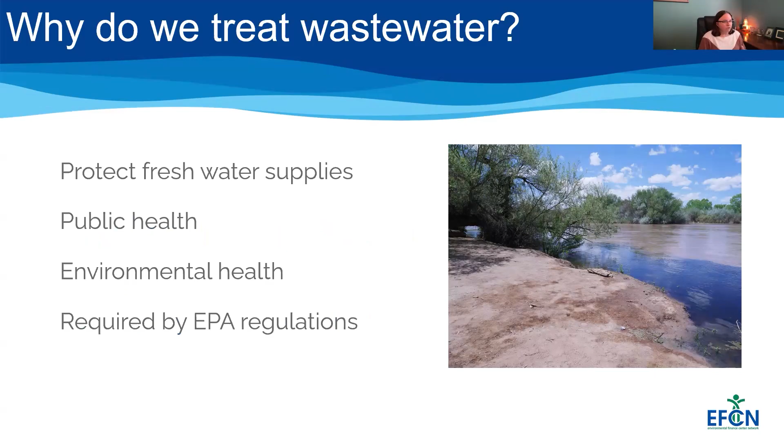So when we talked about treatment, we covered several high-level topics, but the first thing that we talked about is, why do we treat wastewater? So, of course, we treat wastewater to remove pollution and contaminants that are known to cause damage to the receiving bodies of water and disrupt the ability of other communities to treat their drinking water.

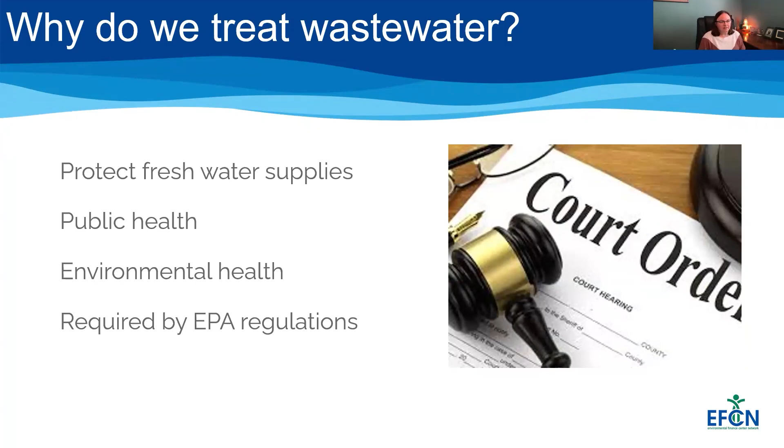Improperly treated wastewater can cause human sickness in waters that are used for fishing, for recreation, and of course as drinking water sources. Improperly treated wastewater that's discharged to the environment can kill local wildlife. It can cause long-term issues. It's also federally regulated. Any wastewater treatment plant that discharges to a point source, such as a river or a lake, is required to have an NPDES permit, which sets loading limits on different contaminants in the wastewater that the wastewater treatment plants have to treat for.

So what do we treat the wastewater for? Well, we treat for excess nutrients. Algae thrive in high nutrient environments, and they'll outcompete other plants and wildlife in the affected area. They'll grow out of control. They use up the oxygen. They can create dead zones or septic conditions in bodies of water. So we're definitely treating for nutrient removal.

Pathogens in wastewater cause human diseases. Some important ones to know that frequently appear in certification exams are cholera, typhoid, hepatitis, dysentery, polio. All of those can be carried in water. Solids and debris add to current amounts of litter that are polluting the environment, especially plastics that are slowly breaking down. And then there's the ongoing concern of what we're now dealing with, microplastics.

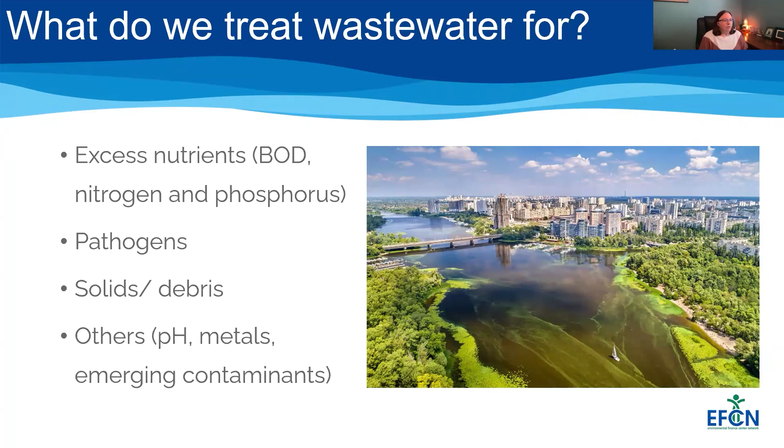Heavy metals can disrupt development in wildlife and humans. The same with pharmaceuticals. Lots of emerging contaminants that EPA is looking at right now. But all of those are things that we treat for. So, of course, as you're learning more and more about wastewater, understanding what wastewater treatment is about is super important. What is this NPDES permit that we're talking about?

National Pollutant Discharge Elimination System. So if you discharge to a body of water that's considered a body of water in the U.S., you have to have an NPDES permit. So it's required for facilities discharging to surface water. I guess that's not necessarily the case for tribal members, but it can be, especially depending on the body of water that you're discharging to.

So understanding and being familiar with what these permits are for is important, because they do specify your effluent limits of what can be in the water whenever you're discharging. It, of course, regulates your sewer overflows, stormwater, national pre-treatment programs, biosolids.

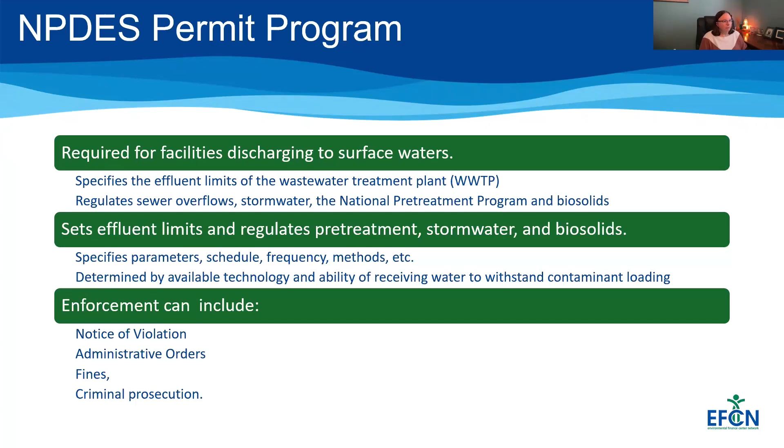It sets your effluent limits. It regulates pre-treatment. And if you are not able to meet your permit, your treatment's not working correctly, or you've had an issue or a failure, enforcement can include a notice of violation, administrative orders, fines, and even criminal prosecution. Because the work that you guys do is very important to public safety and health. So if it's negligent or intentional, it could even lead to prosecution. So very important to know and understand.

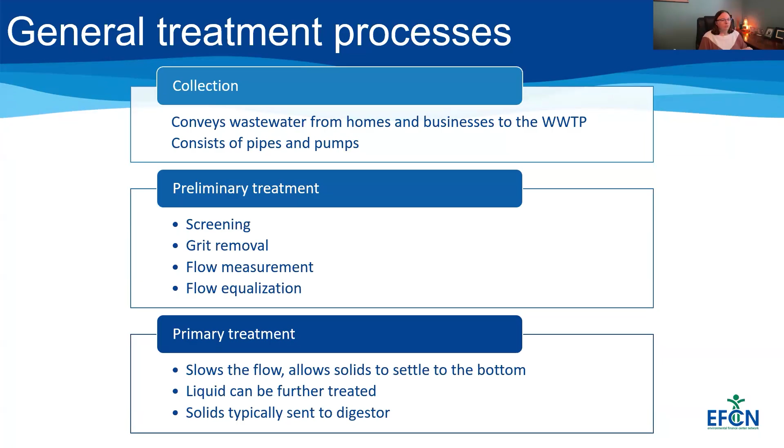The general treatment process that we talked about in this webinar, kind of 6 different levels. The collection system moves the wastewater from the home to the plant. Preliminary treatment is your large solids removal, your screening, your grit removal. Primary treatment removes your organic matter. Then we get into secondary treatment, where we're further removing organics.

The tertiary treatment, not all systems have tertiary treatment, but it is something you should be aware of and understand. This is a polishing stage, and typically it consists of disinfection, but it could also incorporate specialized contaminant removal, such as metals removal or phosphorus removal. And then sludge handling is the process, of course, where your solids are removed and treated and disposed of in a safe and healthy way.

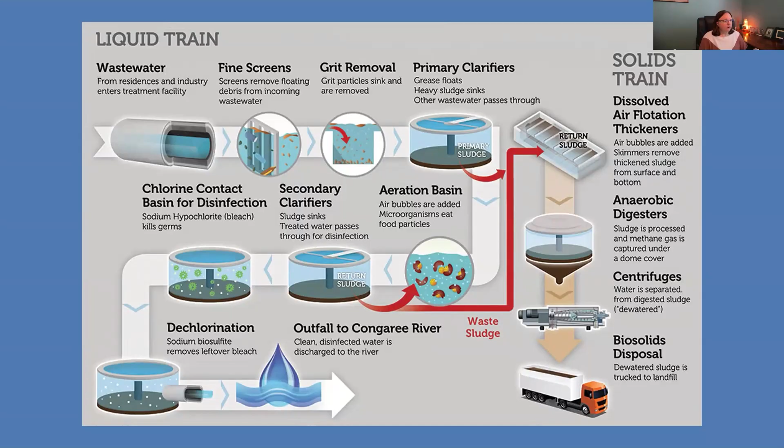The next 2 sessions, we talked about wastewater math. And we will have 2 more sessions on wastewater math. We understand that the math portion of the wastewater operator certification exam can be some of the most challenging sections. And so we want to make sure that you've got all of the information that you need. And if you feel like the math is an area that you aren't the strongest at, make sure that you go back and review these other sessions and get as comfortable as you can with the content that we share here. So 2 different sessions, one at the end of July, one at the beginning of August.

And some of the concepts that we covered in these sessions, we said these are the things that you need to make sure that you understand. These are some of the beginning math concepts to understand. So equations, percentages, units, and conversions. So if any of that sounds like I'm not speaking your language, then let's take some time to go back and review and get familiar with these concepts.

So one of the first things that we wanted to talk to you about was the order of operations. When you are looking at an equation, and it has different things in there, you want to know that there is an order that you are supposed to go about doing that math, and it is not necessarily left to right. Okay, so there's a phrase, please excuse my dear Aunt Sally, PEMDAS, that should help you remember what these concepts are and the order that they go in.

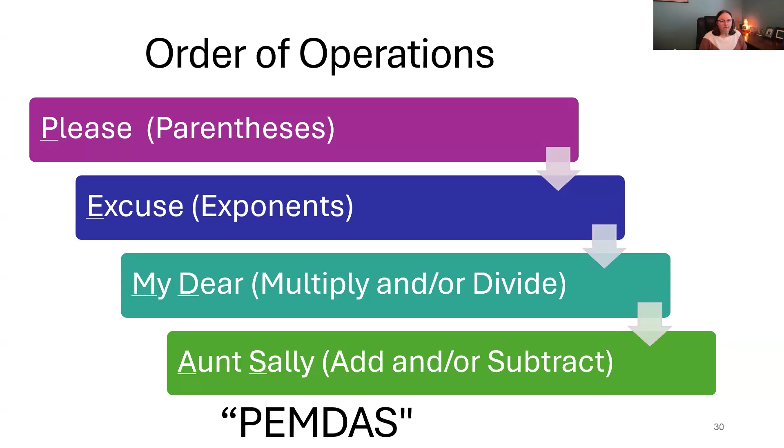And then algebra. So algebra is essentially solving for the unknown and rearranging things. So if you have an unknown, which is a letter such as D, a T, or an X, in your equation, that's what you are looking to solve for, right? That's the answer you're trying to get to. So that means that you need to get it on one side of the equal sign all by itself and everything else on the other side. And you do that by doing the opposite sign.

So here, 46 plus x equals 98. So you want to get x by itself. So that means you have to get rid of this 46. So we're going to subtract 46 from this side and subtract 46 from this side, and that will tell us what x is. Okay, so understanding how to rearrange equations to solve for the unknown. That's the first step in algebra.

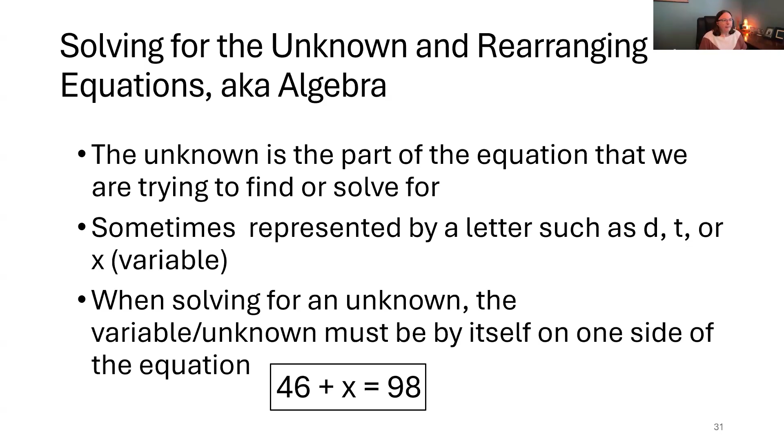And you will be doing a lot of that in wastewater treatment, especially when you're looking at some of the math questions on the test. So understanding how to rearrange equations and what that variable stands for is important. Understanding fractions and decimals, something else that we spent a fair amount of time talking about. So fractions and decimals, that means we're using a fraction or a decimal to represent part of a whole, right?

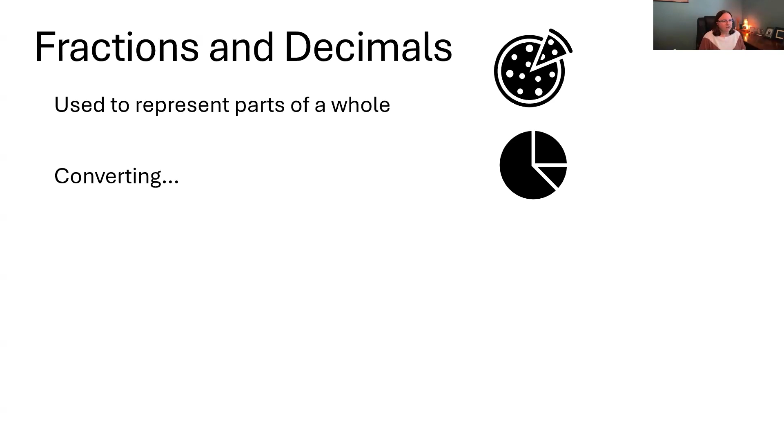So a fraction is a piece of the pie. If you have half of the pie, that 1/2 is a fraction, or 2/3 of the pie, or any of those kinds of examples, those are fractions. Fractions and decimals can mean the same thing. They both mean part of a whole. So when you convert fractions to decimals, you want to divide the numerator, the top number, by the denominator, the bottom number. So 1/2, 1 divided by 2 is equal to 0.5. So that takes your fraction to a decimal, right?

And then the other way around, decimals to fractions, you want to write that decimal as a fraction. So you're going to multiply the numerator and the denominator both by 100. And then you want to simplify to the lowest common denominator. So if you multiply 2.75 by 100, you get 275. And of course, 1 would be the bottom. 2.75 divided by 1 is still 2.75. Multiply it by 100, that's 100. So 275/100 is your fraction, but you can simplify that down to 11/4. So those are concepts that you should be familiar with.

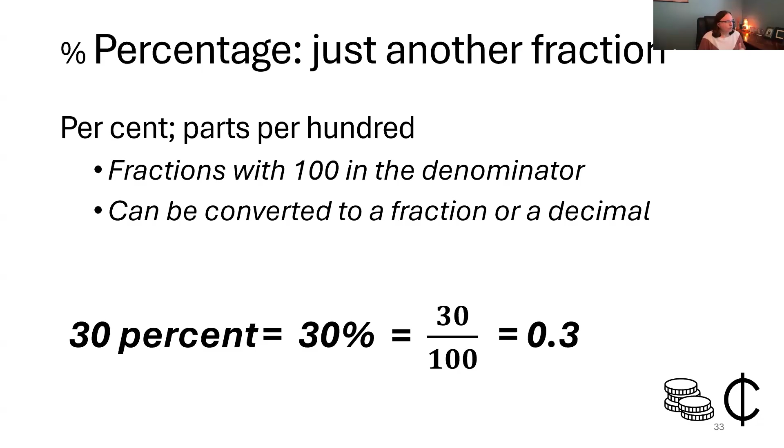And then percentages, that's just another fraction. So percent is parts of 100, right? So fractions with a 100 in the denominator, the bottom. So it can be converted to a fraction or to a decimal. 30% is equal to 30/100, which is also equal to 0.3 or 3/10. Okay, so those are concepts that we want you to be familiar with and be comfortable with going into the exam. The next thing we want you to be super familiar with and understand is units.

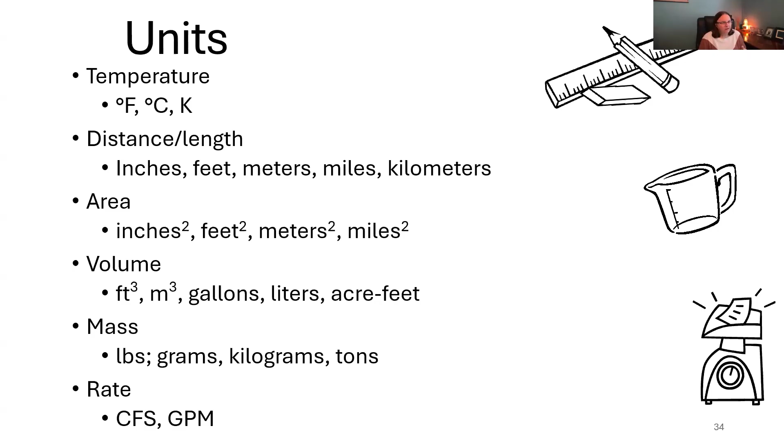Units will be on the test. They will ask you something in inches, or tell you something in inches and ask you for an answer in feet. Or, area could be square inches and then square feet. So making sure that you understand the units, what they are, and if you need to convert them to something else. And when we look at units, one of the things to keep in mind is that when we look at rates, rate is a variable or a measurement, and it's added to one of the other units. So what unit is in rate?

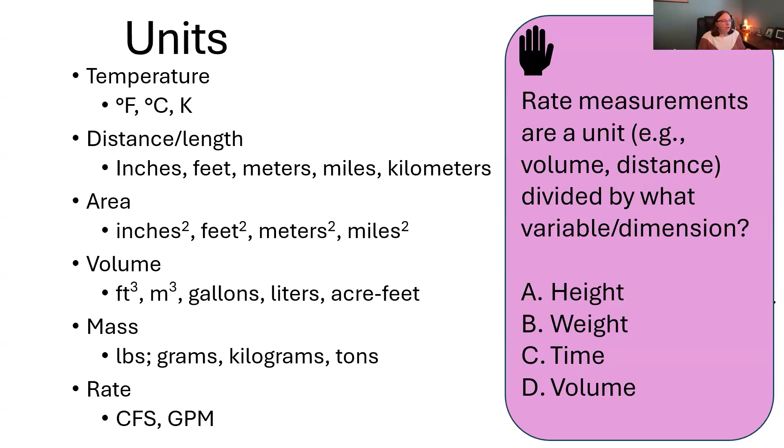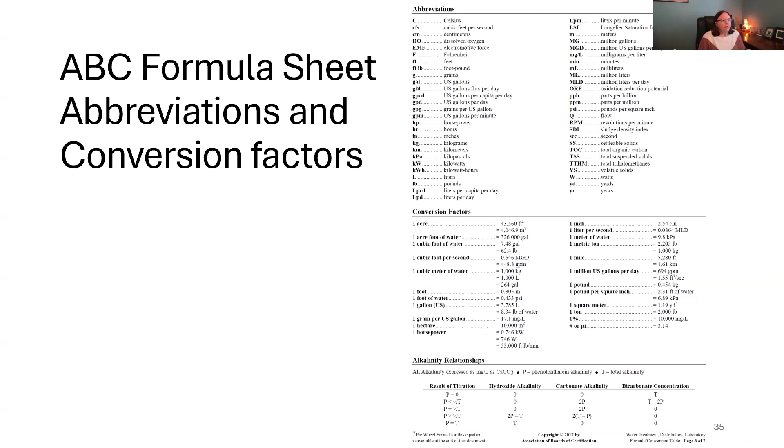How do we use conversion factors? Well, you're really multiplying or dividing your measurement by the conversion factor. You're just turning that conversion factor into a fraction and essentially multiplying by 1. Because you can multiply anything by 1 and not change its quantity, you're only changing the units. So you can go from gallons to liters. You can go from feet to inches. Lots of things you can convert to.

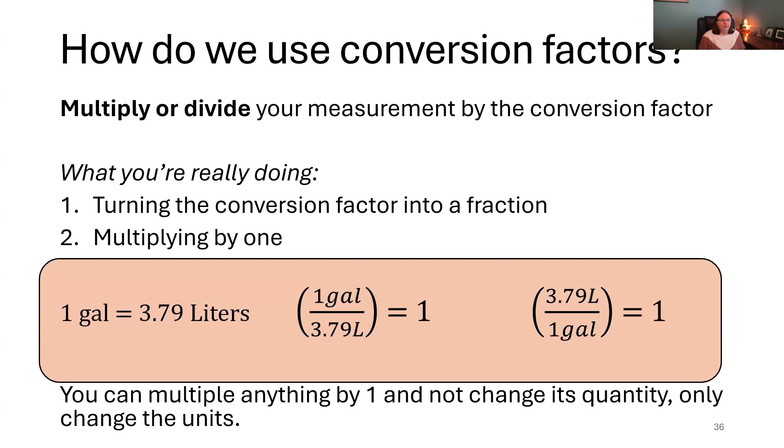Other things we wanted you to be familiar with: surface area basics. So when you're talking about surface area, you're talking about two-dimensional spaces. You're talking about something that's a square or a triangle or a rectangle. And so those are going to be units like inches squared, feet squared, miles squared, meters squared, acres. And you can convert from any one of those to another one with just that simple conversion factor.

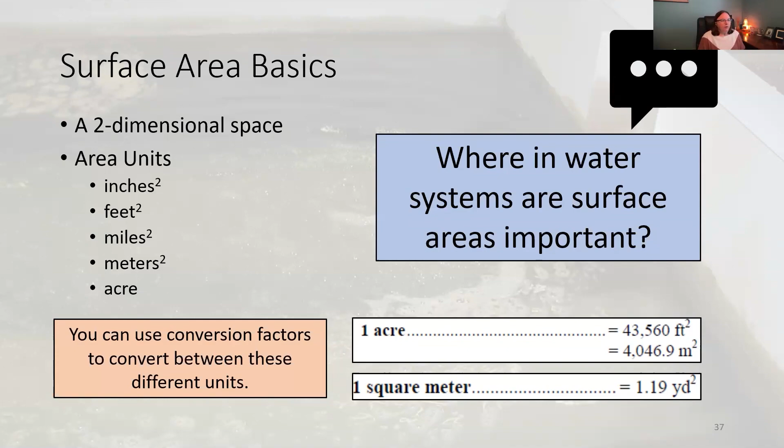Okay. And then we go into, where would this be helpful? Surface area. Why would we care about surface area calculations? Well, you might be looking at something like a wastewater pond liner, or how much weed fabric you need, or how much paint you need, or how much building material you need. All of those would be surface area calculations.

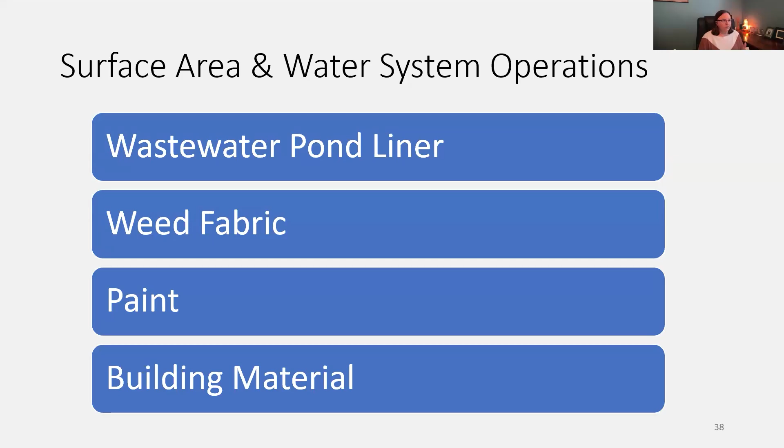Then you can go even deeper, dive deep into some 3D water math. Now we're talking about volume. So this is where we have a length, a width, and a height. So this is a tank, this is a box, this is a cube, this is a cylinder. And so here you're going to have cubic units because you have length times width times height. So cubic feet, cubic meters.

So you can see that you can multiply the length times the width times the height and get a volume, but we don't usually talk about volume in cubic feet. We talk about volume in gallons, so we can convert that cubic feet to gallons. And to do that, we use that conversion factor, and we can cancel out the units that are on the top and the bottom opposite one another. So we can get from 4,500 cubic feet to 33,660 gallons. So those are all things to be familiar with.

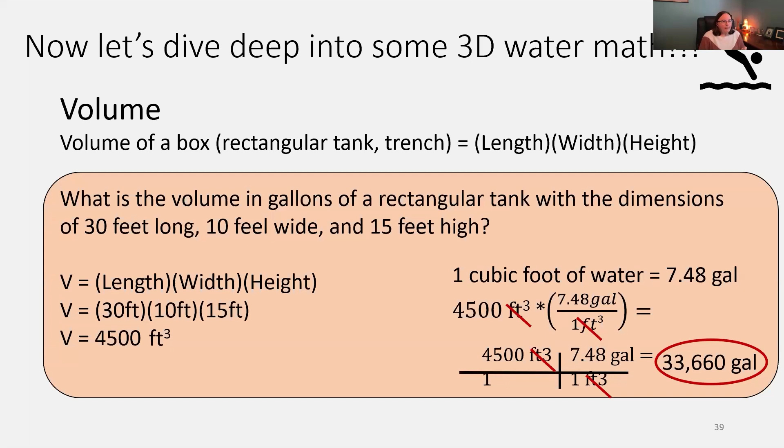When we talk about volume of a cylinder, it's a little bit different than the volume of a cube. So it's not length times width times height because it's round. So we don't have necessarily a length and a width. We have a circle. So we have to understand how that circle comes into effect. So the area of a circle times the height is how we get the volume of a cylinder. So you can either do that with diameter or with radius.

Radius, of course, is the distance from the middle to the edge of the circle, and diameter is all the way across from one side of the circle to the other. The math comes out the same. You're just looking at it from either you're comfortable using the radius or you're comfortable using the diameter. Diameter is always 2 times the radius. So things, again, to be familiar with.

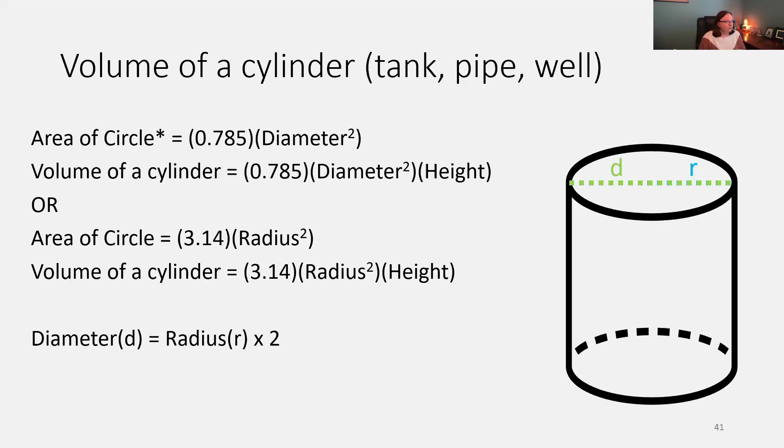Another concept to be familiar with, water pressure. So here we're talking about feet of head or pounds per square inch. Those are the most common. And when we talk about water pressure, we talk about it in tanks a lot, right? So we have tank A here. It's 5 feet in diameter and 75 feet tall, and it holds 11,000 gallons of water. Tank B is 50 feet in diameter and 75 feet tall, and it holds 1.1 million gallons of water. If we have a pressure gauge down here at the bottom of each tank, which tank would have the highest pressure? Tank A or tank B?

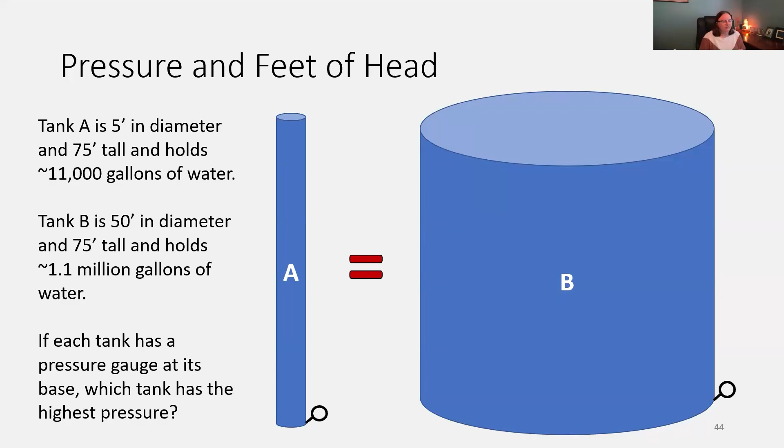They have the same pressure because pressure has everything to do with how tall the tank is and not how much water is in the tank. So pressure is based on the feet of head. The volume's not important at all. It's the height of the water. And that's the direct relationship between feet of head and pressure. So 1 foot of water is 0.433 pounds per square inch, or 1 pound per square inch is 2.31 feet of water.

Okay, so keep that in mind, that it doesn't matter how big the tank is, it matters how tall the tank is. The volume is irrelevant when we're talking about pressure.

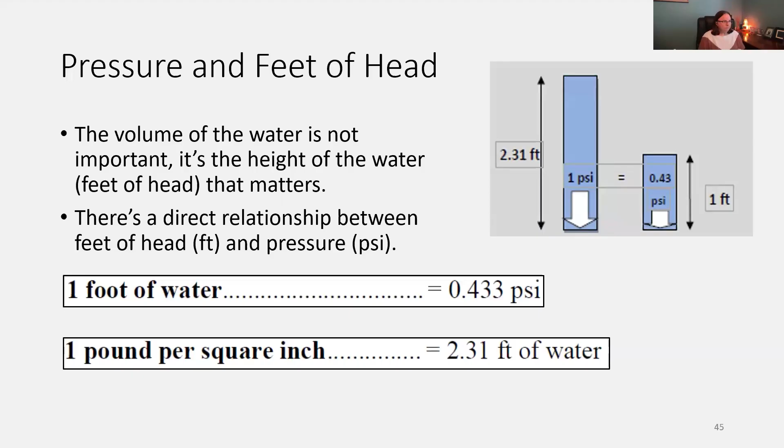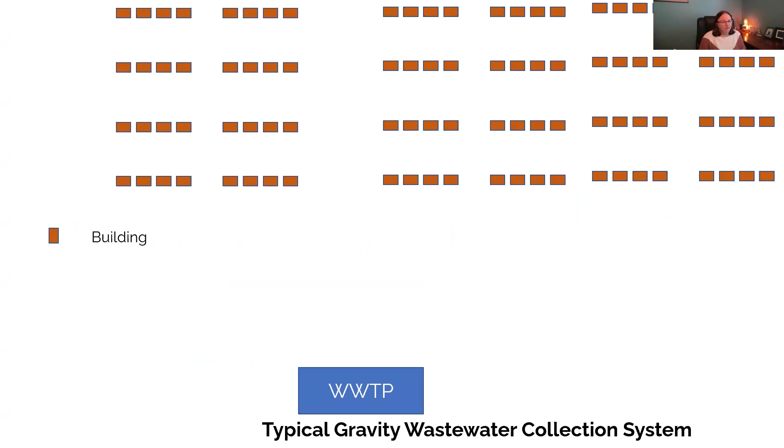The next concept that we talked about, the next session, was on collection systems. We had 3 different sessions on collection systems. We started by talking about the gravity systems. So if you think about a community, right, you've got a bunch of buildings and maybe they're laid out nice and square like this, maybe they're not. But you've got all these buildings and they have lines that go out of the building. So the wastewater leaves the building through that service line or sewer connection line.

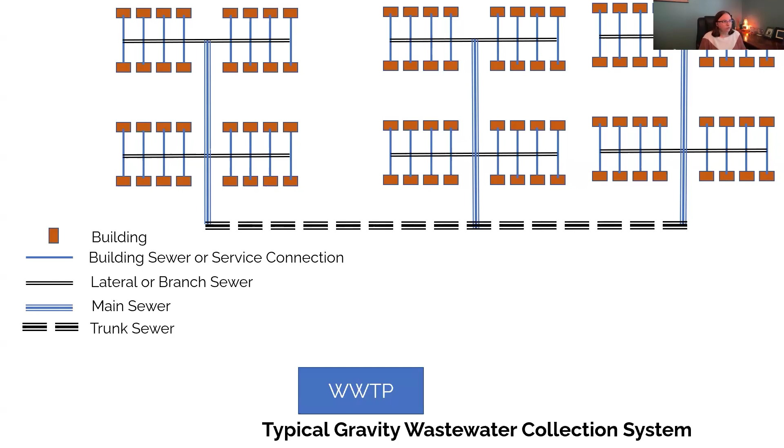And then those connection lines connect to a lateral or a branch sewer. From there, those slightly larger lines connect to the main sewer lines. Those bigger main sewer lines will connect to a trunk sewer line where you will more than likely have a lift station that goes to your wastewater treatment plant.

When we're looking at gravity collection systems, we want to be familiar with some of the design principles. So if water is moving through those pipes because of gravity, we know that we want the water to move fast enough that it prevents buildup in the pipe. So that's called scouring velocity. So we know that water needs to be moving at a minimum velocity of 2 feet per second. And so the slope of the pipe is important to understand, and the velocity of the water moving through the pipe is important to understand.

When we look at collection systems, they're typically designed for a maximum expected flow, the peak flow, when the maximum population density has been developed. So if you're putting in a new neighborhood and you know that right now there's going to be 10 houses, but eventually there's going to be 50 houses, you don't want to put in sewer pipe that's too small for the 50 houses. You want to put in sewer pipe that will eventually serve all 50 homes.

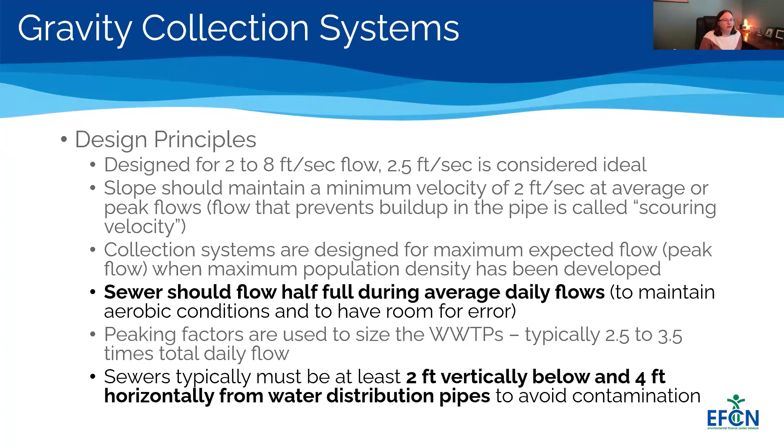So those are some things that your design engineers have to be familiar with and understand, but also that you should be familiar with and understand, because if you're laying sewer line or you're working on sewer line, you want to understand why maintaining slope is important. Separation between water and sewer, pipe sizing is important so that you're not putting in pipe that's too small, and possibly leading to pipe clogging, or having velocities that are too high, different things that can happen if the pipe's not properly sized.

We then talked about the different types of pipe. And so, we walked through the different types, and I'm sure you guys are familiar with some of these, but maybe not all of them. So if you see one of these on an exam, you now are familiar with it. Maybe you've not heard of VC pipe before. Now you are, vitrified clay. I think a lot of us are familiar with PVC and maybe cast iron or ductile iron, maybe not. Asbestos cement, maybe not, depending on the age of your system and all of the different things that you've experienced in life.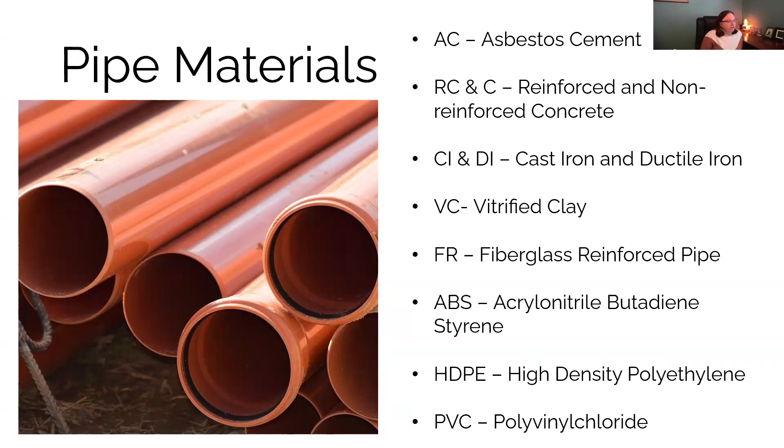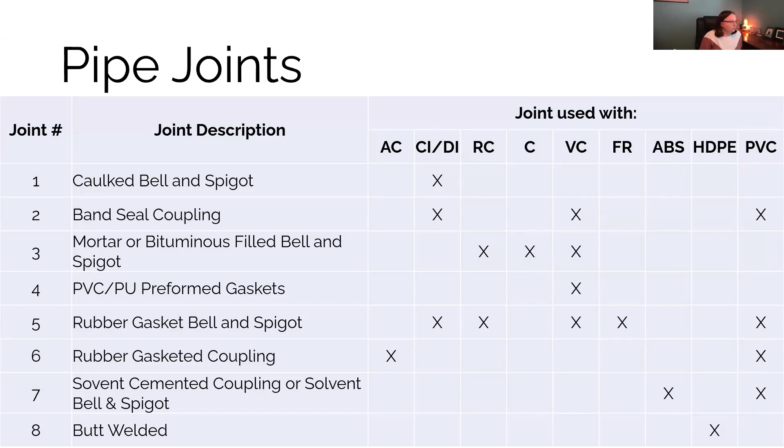So just be familiar with the different types of pipe, and then the different types of pipe joints. So there are different types of joints, and not every type of joint works with every type of pipe. So understanding the different types of joints and when you can use them is something else to be a bit familiar with. And I don't think this is necessarily a straight up memorization, but just a familiarity, that if you're using PVC, you're going to be using a certain type of joint. So we want to make sure that those bits of knowledge are familiar to you.

And then installation, so gravity collection systems. If you're thinking about your gravity pipe, of course, when you're thinking about installation, excavation safety is super important, something that you should be familiar with before you're ever in the field working on a sewer line. So your OSHA trench rules, understanding, and we'll talk about it a bit more, when to shore or have trench protection, those kinds of things.

Also understanding how bedding and backfill impact your pipe integrity. If your pipe's not bedded correctly, if it's not got the right type of material around it, your pipe can compress, so it's no longer round, but it's more oval. So that pipe integrity becomes a problem. So understanding bedding and backfill is important.

Knowing that your connections, the bells, if you have a bell type connection where one pipe slides over the other pipe for a small length, that the bells face upstream. Also understanding deflection testing and making sure that your pipe does stay round and that the water can continue to flow well.

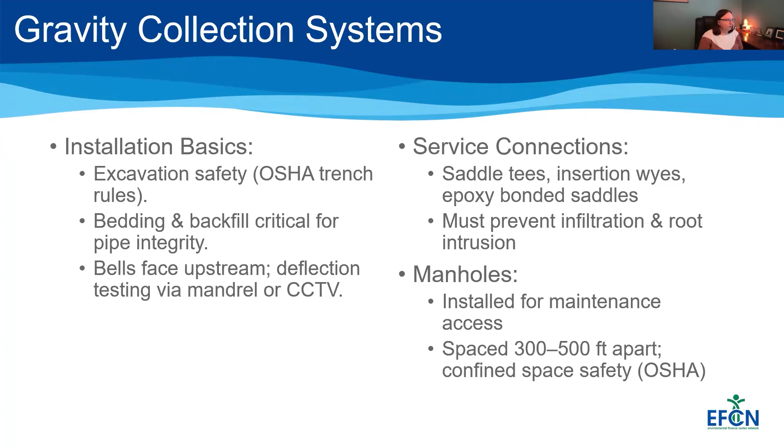Entering a manhole can be quite dangerous as sewer gases can build up in them. And lots of bad things can occur, suffocation and air poisoning and other things. So understanding your confined space safety before opening or entering a manhole, very important.

The next thing we talked about with collection systems was pumping and force mains. And I did this presentation. So the pumping and force mains of collection systems, we talked about what's the purpose of a lift station. Well, the purpose is to raise wastewater from a lower elevation to a higher elevation. And of course, that would require a pump to move the water into the force main. And after the force main, gravity typically takes back over again.

We don't pump from the lift station all the way to the wastewater treatment plant unless it's the lift station right at the treatment plant. And there are typically two different types of lift stations: a wet well, where there's only one chamber and the pumps are in the water, or a dry well where there are two chambers and the pumps are not in the water. They're adjacent to the chamber that holds the water.

We walked through the lift station components. There are lots of parts: pumps, hardware, bar racks, valves, electrical systems, alarms, motor control centers, pump controls, force mains. So we walked through what they were. You need to know what these do and how they work and what's required.

So for example, lift station hardware has to be high grade aluminum or stainless steel to prevent corrosion. So, where would you need that to be aluminum or stainless steel as opposed to a metal that could rust and fail? So understanding the components and how they work and what the requirements are for them is important.

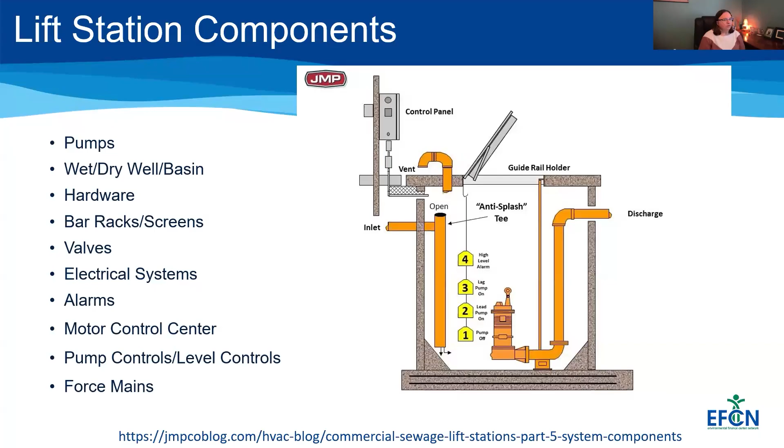Most lift stations do have three-phase electrical service and backup generators. And that's not always the case, especially in our smaller systems. But I think for the operator certification exam, that's going to be the assumption, is that they have three-phase electrical and backup generators. So being familiar with those components is important.

When we talked about lift stations, we talked about operating them. How do they operate? Well, the water flows into that wet well, into that storage tank, that concrete storage tank. And as the water flows in, the water level goes up and up and up until it reaches the first set point. And at that first set point, the first pump should turn on and the water level should start to decrease because the pump is pumping water out of that tank.

If, however, the water level continues to increase, a second set point will be reached and a second pump will come on. And this is only if the tank or the pump station is equipped with a lead lag pump. So sometimes they're not, but sometimes you have lead lag pumps where there is a second set point because flow rates can vary.

So you could have a second set point. The water is then being pumped out faster than it enters, so the level decreases, a low level set point is reached, and that turns your pumps off. And those set points can be controlled by a variety of things: floats, gauges, different things. So understanding how they operate and what those set point controls are is important.

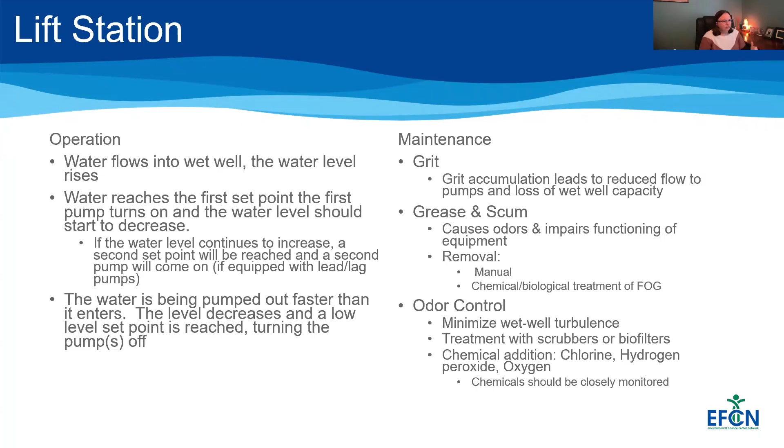And then maintaining lift stations: grit is always an issue, grease and scum and what it can do to a lift station, and especially those set points, clogging them, blocking them. And then odor control. You can have a fair amount of odor at lift stations because you are creating some turbulence and releasing some wastewater gases. So there are ways to control the odor at lift stations. So all things to be familiar with.

Lift stations have pumps in them. There's typically two types of pumps, positive displacement or centrifugal pumps. And so understanding the difference between those types of pumps is important. Lift station pumps are more often than not centrifugal pumps. As we talked about the two different types, they can be positive displacement, but more common are centrifugal pumps.

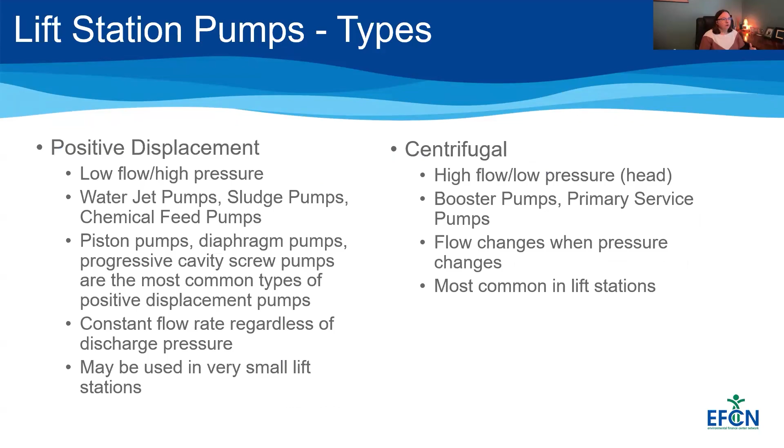So understanding the operation of them: of course, you don't want to start them or run them dry because the water is used as lubrication. So if you run them dry, they're going to probably bind up, and that's never a good thing.

And pumps can cavitate. If the pump's not running at the designed flow or pressure, it can create a vacuum. And that vacuum will cause the water to turn into a vapor. And when it returns to liquid, it reacts quickly. It causes damage to the pump, and over time, that can lead to significant damage. So understanding that a cavitating pump can sound like a can of marbles being shaken is important. There are other indications of cavitation as well, but the marble sound is a very common one.

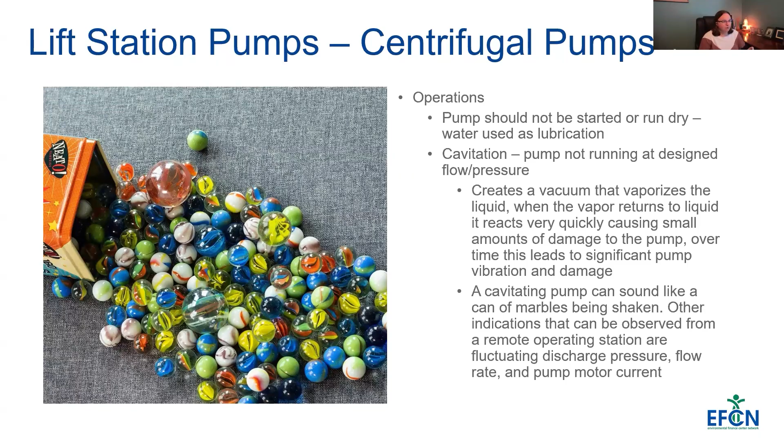And then finally, lift stations pump the water out through a force main. So this is the discharge pipe of the lift station. It is under pressure. The water is under pressure. The rest of your system is probably not under pressure. It's gravity pipe. But here, in your force mains, the water is under pressure.

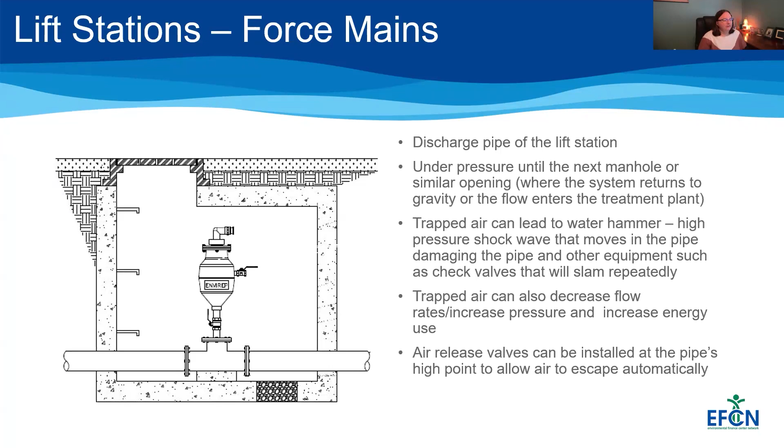And you can trap air in the system and have shock waves or water hammer. It can decrease flow rates. It can increase pressure, and that can all increase your energy use. So air release valves are sometimes installed to help allow that air to escape automatically. So again, high level, that's what we're covering about your pumps, your lift stations.

Next, we talked about collection system maintenance. So some of the common collection system issues: we categorize our most common collection system issues into these four areas: obstruction, structural issues, environmental issues, infiltration and inflow. So being familiar with what can cause collection system obstructions is important.

So how do you inspect or monitor your collection system? Well, there's several different ways. There are visual inspections, so popping your manhole lids, looking to see what's going on in the manhole. CCTV, so this is a video camera that you can put inside of your pipes and see the inside of your sewer system. Flow monitoring, where you look at measuring your flow rates to identify different flow patterns.

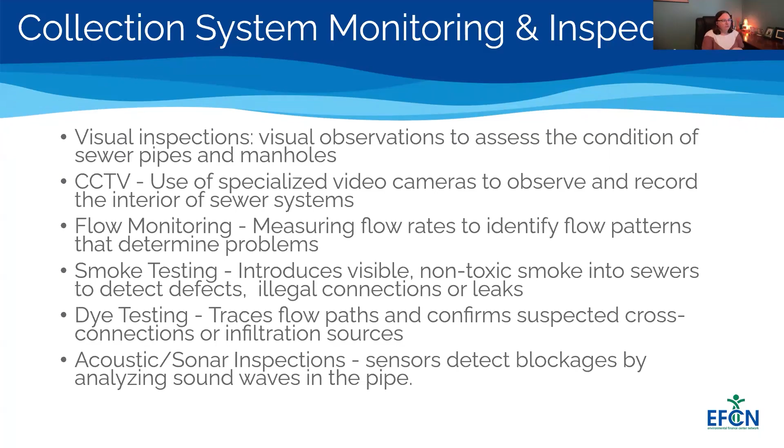Smoke testing, so you put smoke into the sewers, and if smoke is coming out in places it shouldn't be, that indicates connections, illegal connections, leaks. Other things, dye testing. This is where you put a dye into the water and you can trace your flow. And then there's acoustic sensors and sonar inspections that can help detect blockages, things of that nature.

So how do we maintain our system? Well, we want to understand preventative versus emergency maintenance. Preventative is scheduled work, it's proactive work, and emergency, of course, is unplanned, it's reactive. We want to aim for more preventative maintenance than emergency maintenance.

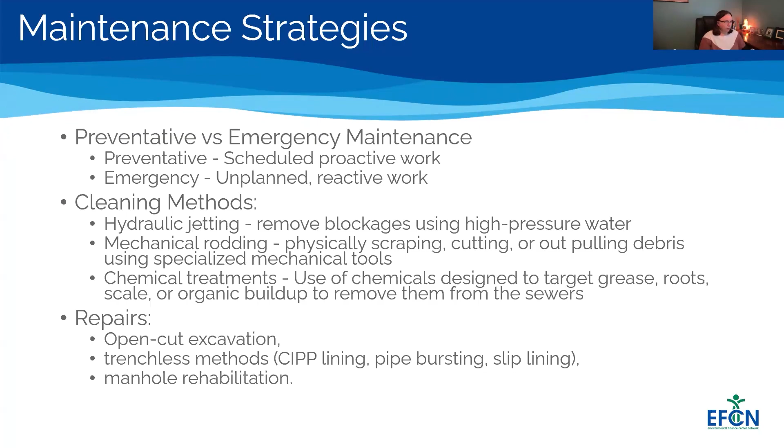Cleaning methods: we can use hydraulic jetting, mechanical rodding, chemical treatments, and then, of course, repairs where we have open cut excavation, or we use a trenchless method like pipe lining, pipe bursting, slip lining, and then there can be manhole rehabilitation as well. We talked about maintenance planning and scheduling.

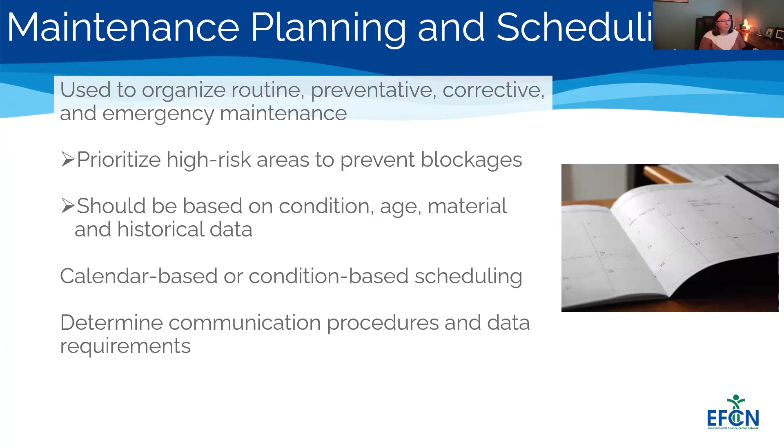We want to use maintenance planning to organize and plan our routine preventative and corrective maintenance. And then our emergency maintenance is harder to plan, but be aware that we will still have emergency maintenance. Prioritizing our highest risk areas to prevent blockages. We also want to take into consideration the condition, the age, the material, and any historical data that we have. And we want to schedule maintenance using a calendar or condition-based scheduling. So those were all concepts we talked about in that session. Next, we talked about operator safety.

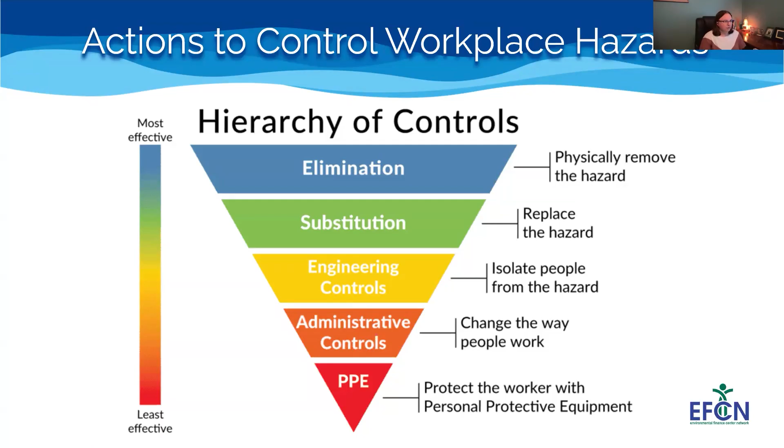When we think about hazard control, wastewater can be an infectious material, so you want to use your PPE like your gloves, your safety glasses. Of course, it's water, so it can be slippery. You should use caution around any wet environment. You should learn to swim. And you should be familiar with where your personal flotation devices are. Electrical hazards exist with anything at the wastewater treatment plant or any lift station. You should have a lockout tagout program.

Excavation safety. If you are digging, you should have excavation safety training using shoring, shielding, or sloping to prevent trench cave-in. It's almost impossible to save a life if there's a trench cave-in. Ladders are required in excavation safety. Chemical hazards, understanding what safety data sheets are, understanding the safety squares, those diamonds that have the different colors, and using your PPE. And then confined space, understanding that any confined space requires a permit and requires monitoring.

Safety equipment, your respirators, your SCBA, your self-contained breathing apparatus, your emergency gear. And then I kind of added your gloves, your eye protection, your toe protection, and your inoculations. The next session that we looked at was preliminary treatment. So we started getting into the treatment process in this session back in October.

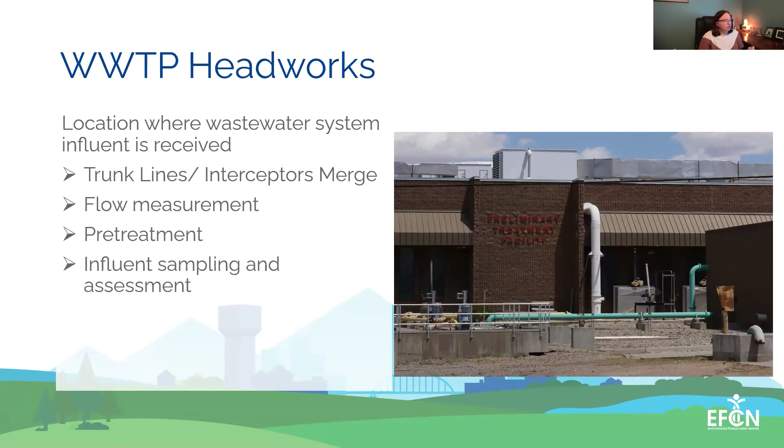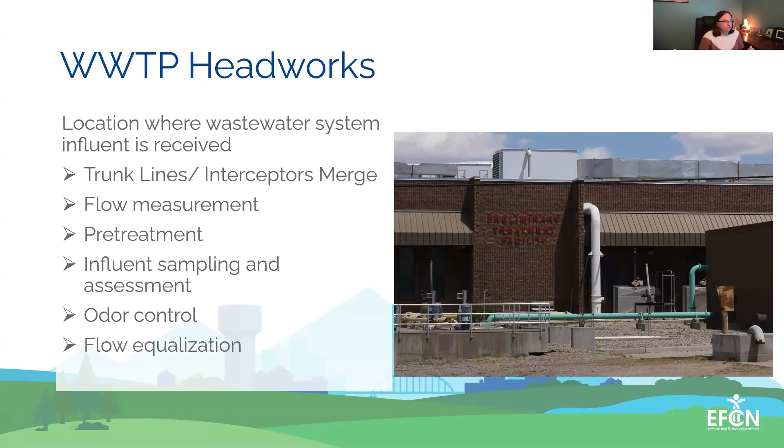So here we were looking at anything where the wastewater system influent is received at the treatment plant, the headworks. So these are your trunk lines, your interceptors. This is probably where you're doing flow measurement, where you have any pre-treatment, where you would do influent sampling. You may have odor control. You may have flow equalization. And flow equalization can also be used for emergency storage, which sometimes is necessary, and any pre-aeration.

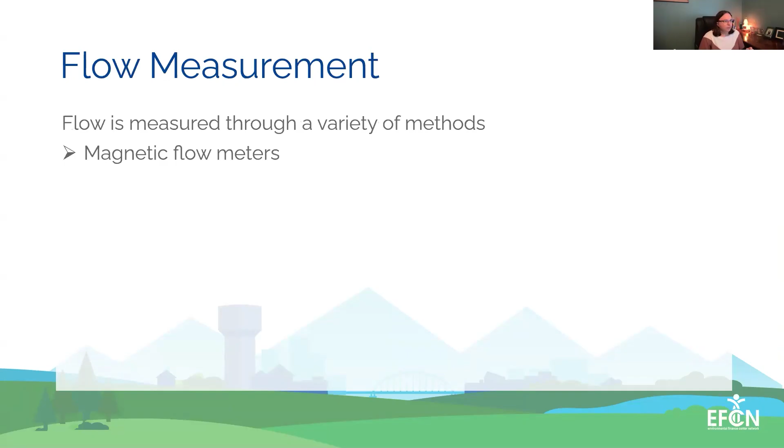Flow measurement happens here. So flow is measured through a variety of different tools. So you might have magnetic flow meters or mag meters, a Parshall flume, V-notch weirs, rotameters, ultrasonic level sensors. You want to make sure that your flow meters are placed in easily accessible areas and that they're in long straight sections of pipe. If not, if they're in a place where there's turbulence, it can create inaccurate readings. So different types of flow measurement that you should be familiar with.

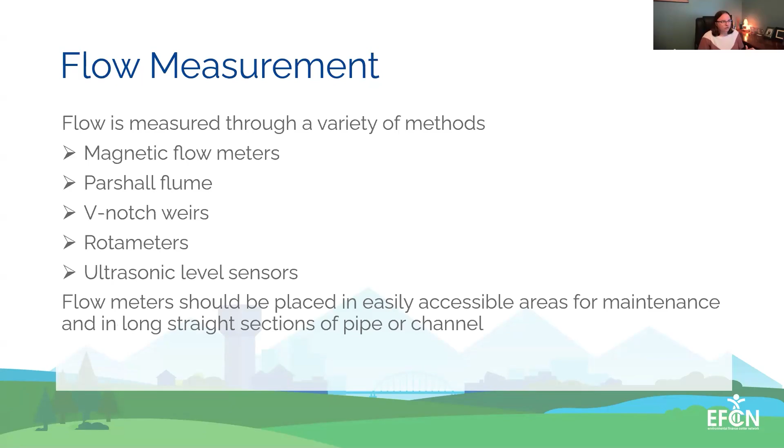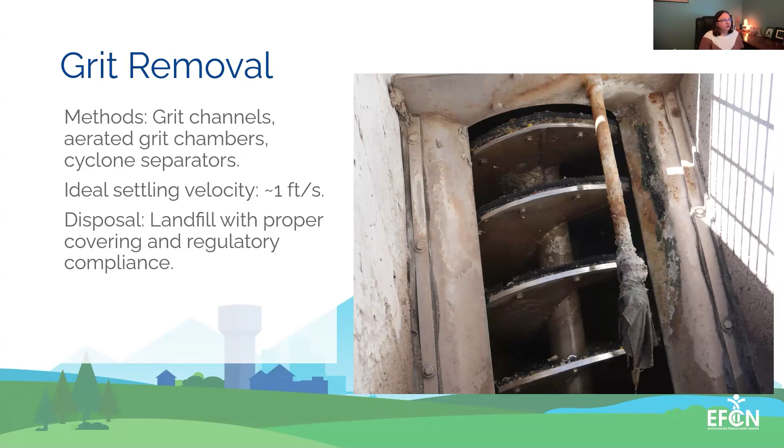Grit removal. You could have grit channels, you can have aerated grit chambers, you can have cyclone separators. They should be allowed to settle. So the ideal settling velocity, 1 foot per second. And again, disposal at a landfill. So other pretreatment information, we want you to be familiar with influent sampling, that you can do composite or grab samples. You may need odor control and your flow equalization pre-aeration.

If you have equalization tanks, these are used to help manage your peak flows so you don't have this big, huge amount of water come in suddenly. It slows that flow down and makes the flow entering your wastewater treatment plant nearly the same all the time. And then pre-aeration can help improve your treatment efficiency, and it can help with reducing odors.

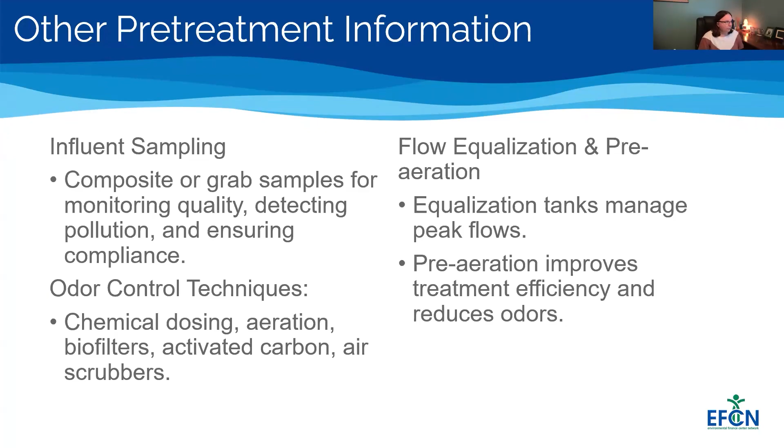The next session was on sedimentation, flocculation, and flotation. And goodness, I am moving through this as quick as I can, but we covered a lot of material. So if this is all sounding familiar to you, that's great news.

And if not, I hope that you will take the time to go back and review some of these sessions.

So the differences between sedimentation, flocculation, and flotation: they're similar, serve similar purposes. But sedimentation is where the heavy particles settle to the bottom by gravity. Flocculation is where we use something to cause the small particles to clump into larger ones, whether that's a polymer or a different type of chemical, which makes your settling faster.

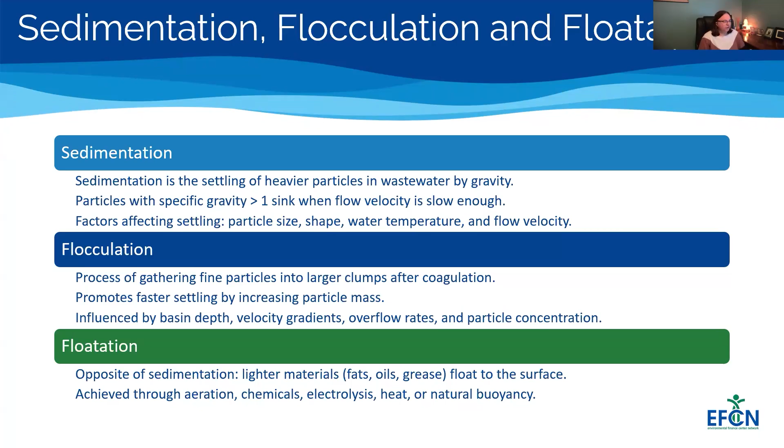Flotation is the opposite, where the lighter materials float to the surface, your fats, oils, and grease. And this is achieved with aeration, with chemicals, with heat, other ways. The sedimentation principle of solid settling and lighter items floating to the top is used throughout treatment. It can be in preliminary treatment, in grit removal. It can be in primary treatment, in removing your suspended solids in your clarifiers, and secondary treatment in your biological floc removal, if that's in your activated sludge process. So the idea of sedimentation is used all throughout wastewater treatment.

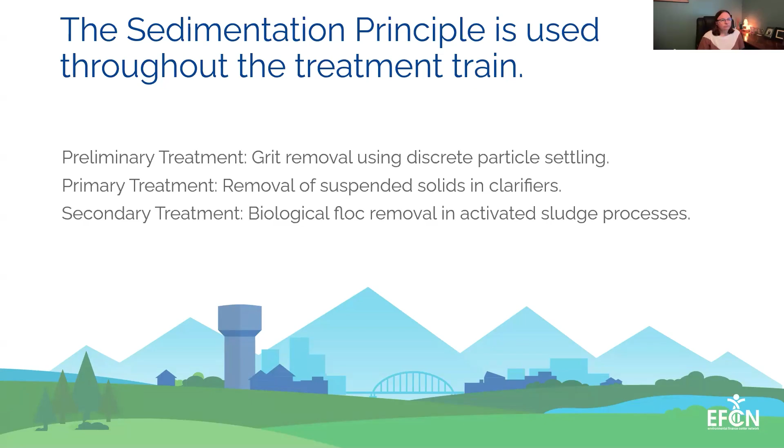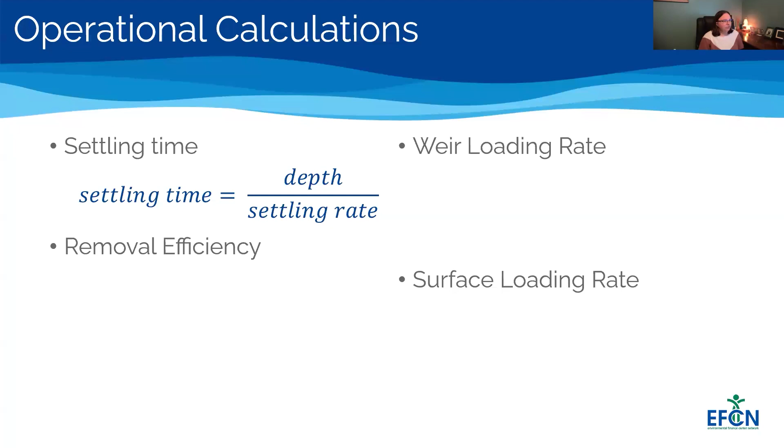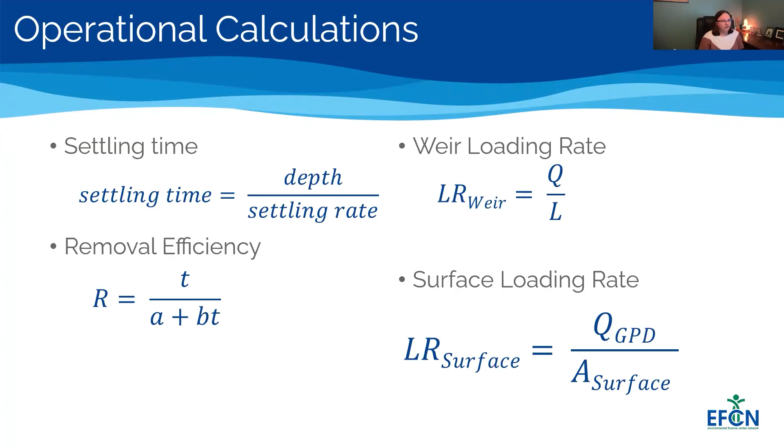So different operational calculations you should be familiar with. Settling time: this is the depth divided by the settling rate. The removal efficiency. The weir loading rate. So weir loading rate is flow over length, whereas surface loading rate is flow over surface area. And you can use these calculations to compare facilities to common design values.

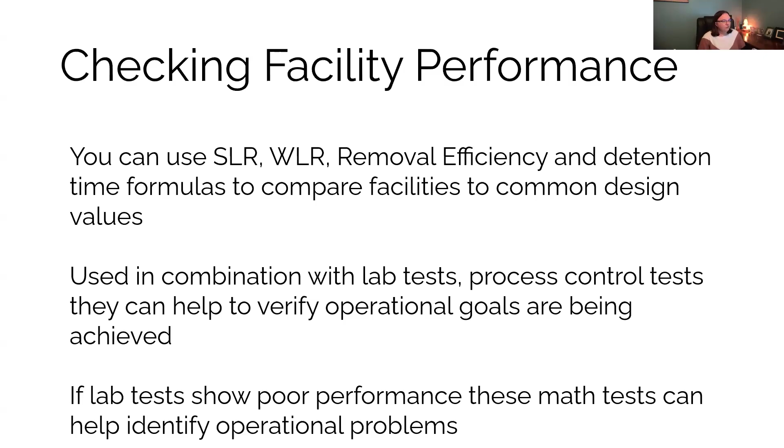And when you use them in combination with your lab tests, your process control tests, these formulas can help you to verify your operational goals are being achieved. And if the lab tests are showing poor performance, these math tests can help identify where the problem's occurring. So it's more than just being familiar with the equation so that you can answer a question on a test. It really is about understanding the operations of your system and if they're operating the way that you think they should be operating. Then we talked about fixed film processes.

We're now in November. We're hitting the end here, guys.

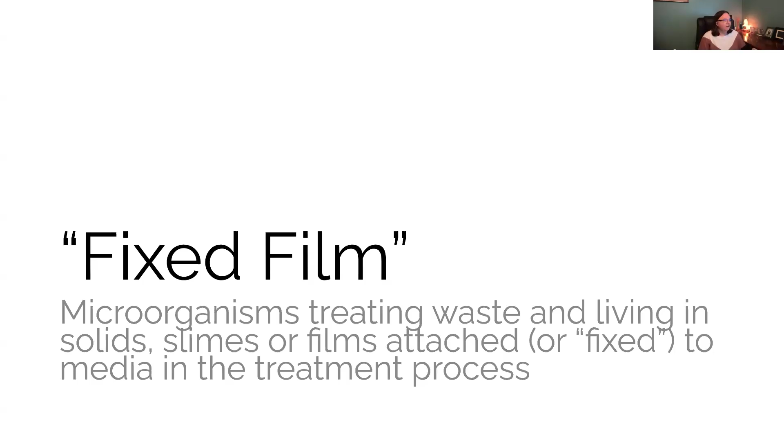So fixed film processes: when we talk about fixed film, we're talking about microorganisms that treat the waste living in some type of a film that's attached to or fixed to some type of a media in the treatment process. So fixed film, we typically talk about primarily the removal of BOD. And here we have trickling filters and we have rotating biological contactors.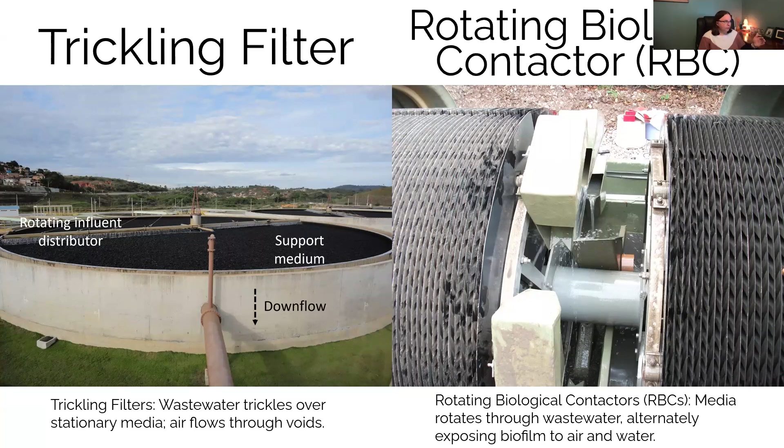In both cases, there's a media, and in both cases, there's a film and there's water. The difference is that with trickling filters, it's stationary media and the air is in the voids between the media. And with RBCs, the media rotates through the wastewater, so it's exposing the biofilm to the water and the air as it rotates. So for either one of these, the design and operational highlights, there are differences and similarities. So the trickling filter, as I said, the media is stationary, whereas with the RBCs that rotates.

The media type, there's organic, which is typically rock, or synthetic, which is typically plastic. We don't see too many trickling filters being designed with rock anymore, but there are plenty that still exist around the country. And so the weight difference is important to understand. Whereas the media types with RBCs, there's standard density and then there's high density. And the differences here are if you are just looking for BOD removal or if you're also looking for nitrification. So a couple of things to understand about the design.

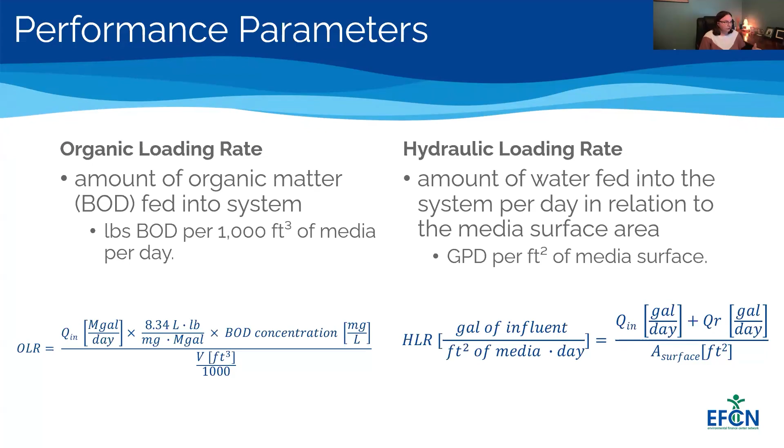These performance parameters, the math is the same whether we're looking at trickling filters or RBCs, but these equations are things that you should be familiar with. So organic loading rate, this is where we're looking at the amount of the organic matter, the BOD, that's coming into the system. And the hydraulic loading rate is the amount of water fed into the system per day in relation to the surface area. So organic loading rate is essentially the amount of food we're feeding it, and hydraulic is the amount of water we're feeding it.

A couple of others: recirculation. So you probably have some of the water that's been treated going back to the beginning of the process. This allows you to control the volume of the water that's entering the system without impacting the amount of BOD. So you want to understand what that ratio is. And then your dosing rate, this is used to control the biofilm thickness, and this is by adjusting the speed.

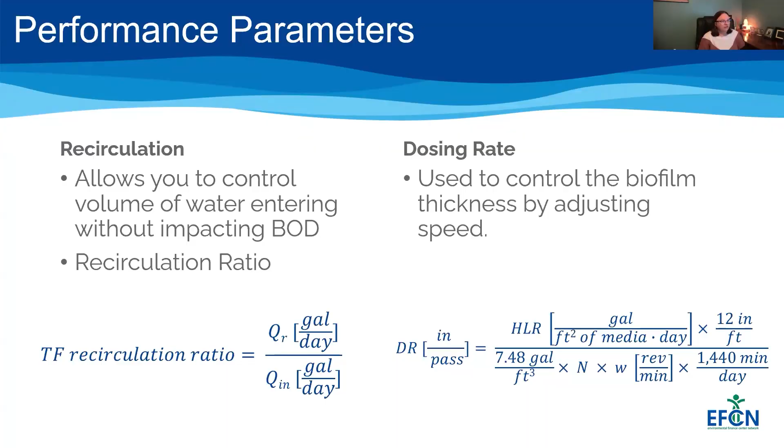So these formulas are things that you should be familiar with, you should understand, you should practice some math. And we will get into more of that in the sessions that are coming up in the next few months. Things that you have to sample with this type of treatment with fixed film: TSS, BOD, COD, DO, pH, temperature, chlorine residual, and E. coli, or coliform. So things to be familiar with there.

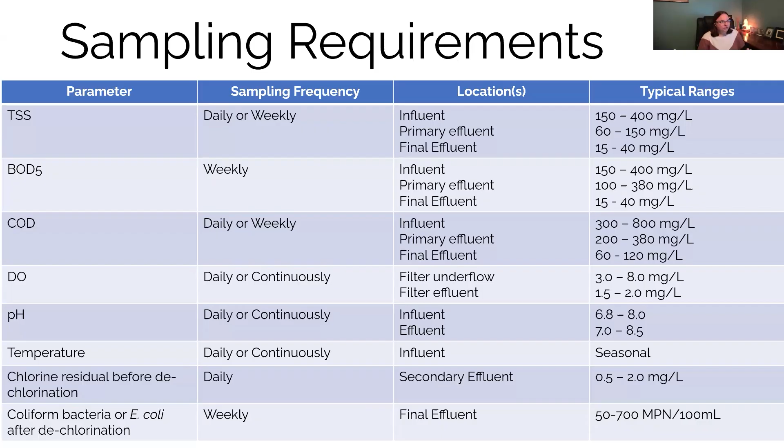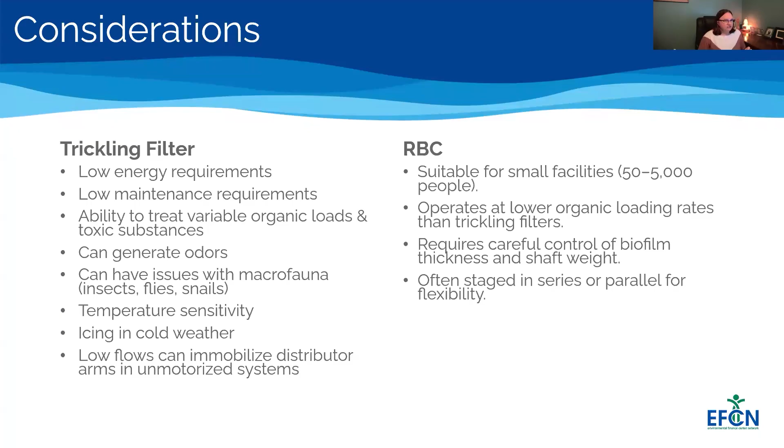And then why might you want to use one or the other? RBCs are suitable for smaller facilities. Trickling filters have lower energy requirements, but they can generate odors. They can ice over in colder weather, which you guys don't have a lot to deal with, but there can be issues, and since the test is taken nationally, things to be familiar with.

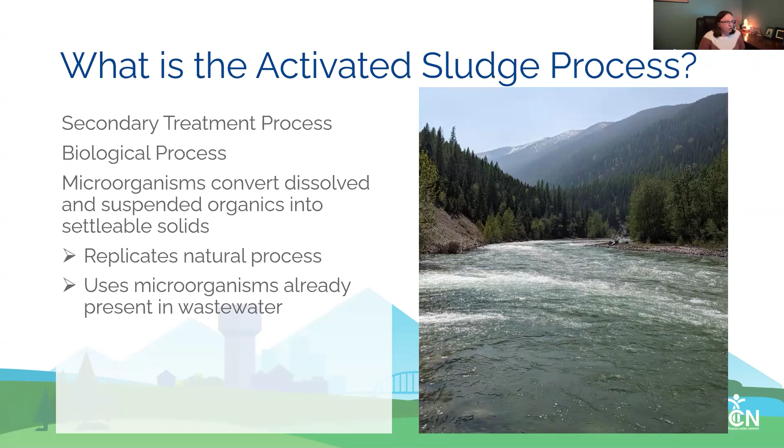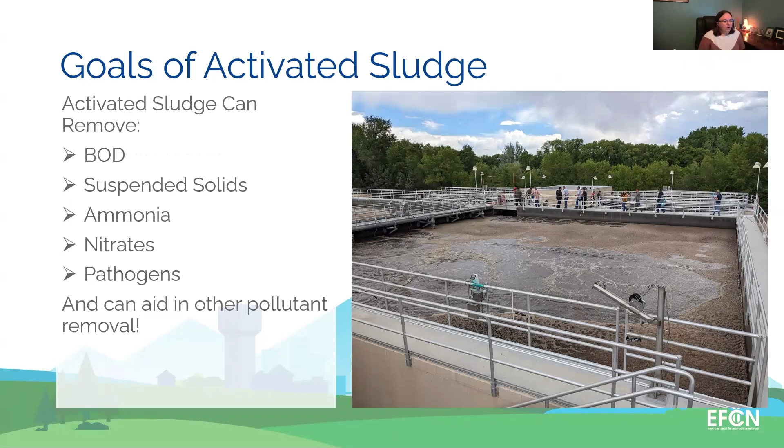This process mimics what we see in nature, and they use microorganisms that are already present in the water. The primary goal is to remove our BOD, but it can actually achieve more than that. Activated sludge can remove BOD, suspended solids, ammonia, nitrates, pathogens, and it can aid in other pollutant removal as well. So all things to understand and be familiar with.

How does it work? Well, the influent comes into an aeration tank where air is being pumped in and mixed with the cultivated biomass called the mixed liquor. The microorganisms use that oxygen to allow them to break down the organics. The microorganism byproduct is the sludge. It settles in the secondary clarifier where it's either recycled or it's wasted.

And so the components of activated sludge: you have your aeration systems. They might be diffused, they might be mechanical, they might be jet aerators, and typically a blower. You have mixers to maintain the suspension and prevent dead zones. And then you have secondary clarifiers for settling. And of course, you have monitoring equipment for DO, MLSS, ammonia, nitrates.

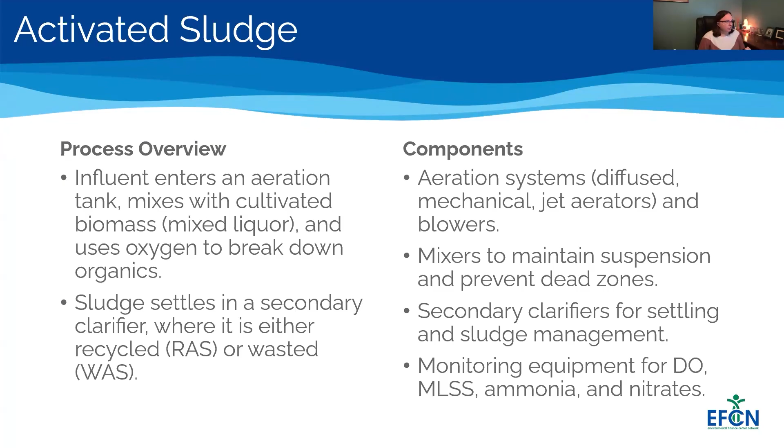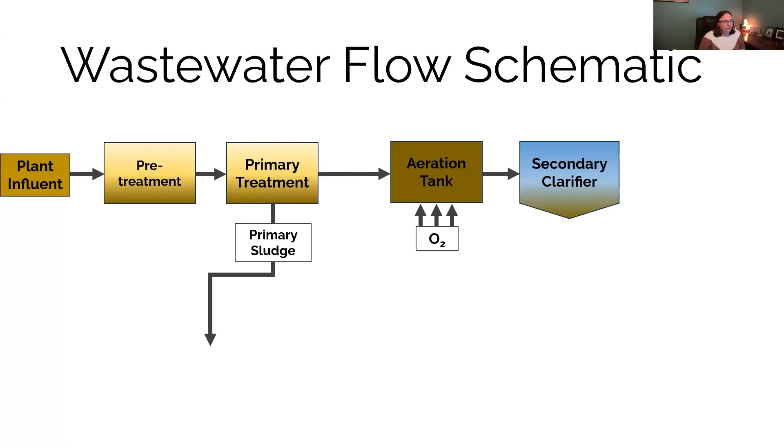So our flow schematic, all of the primary treatment. So we talked about your plant influent, your pre-treatment, your primary treatment where you might have grit removal and flow measurement. Then you would have your aeration tank. So this is where we're pumping air into the tank and the water's flowing into it. The water goes to the secondary clarifier for the solids to settle out. And the solids are removed and recycled back into the aeration tank or wasted as solid waste.

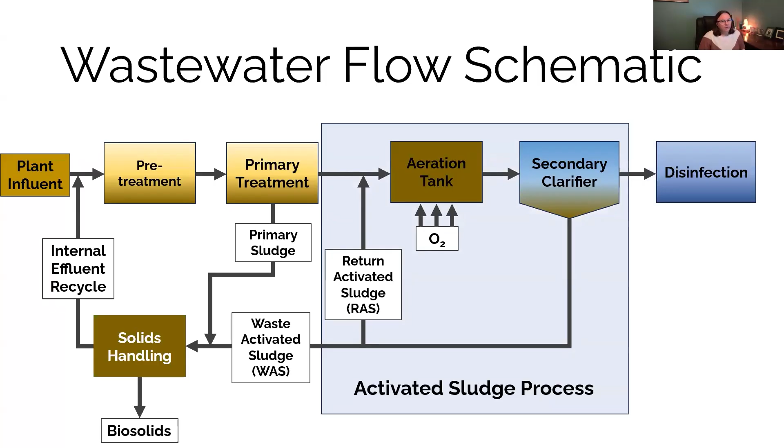So the activated sludge process is this part in the gray box. And then, of course, we would have solids handling and effluent recycling and biosolids, and we'll talk about those more in upcoming sessions. And then disinfection of the treated water before it goes to the receiving waters. So activated sludge, understanding some of the biology and the nitrogen removal through nitrification and denitrification. Those were things we covered.

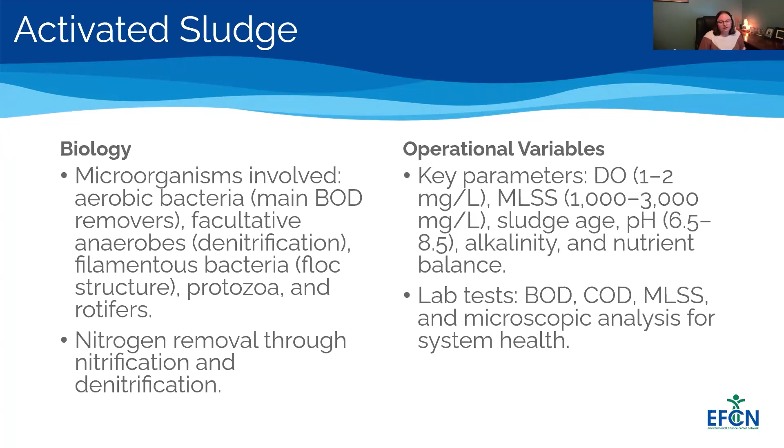And then we talked about some of our operational variables, what our key parameters are. Being familiar with these key parameters is super important to having a successful activated sludge process. If you don't understand what DO is and what those levels should be, you can be feeding too much air and wasting energy, or not enough air. So really understanding these parameters is important for successful activated sludge. And then what kind of lab tests do we do? So we had a little video.

So why are the activated sludge process characteristics and control important? I talked about understanding DO and the different things. The biological process has more variables than physical and chemical processes. So the operational data has to be used to adjust your process and to make sure that you're controlling that process based on the data that you're getting back. The characteristics can change daily, if not more frequently. And this process, the activated sludge process, must be maintained in a balanced state.

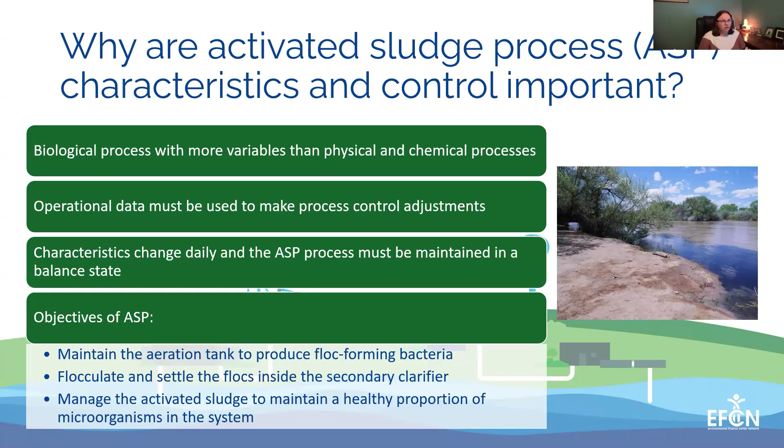And then what's going on in the process itself within the activated sludge process. So you're going to be looking at your DO levels, your F to M ratios, your MLSS, your solids retention time. So understanding these parameters helps you understand what's going on in the activated sludge process. So you can then make adjustments to keep that process healthy and working properly. Otherwise, you might have sludge that's not settling, or you might have buildup of sludge in your clarifier, or just a whole abundance of things that can go wrong.

So we want to make sure you really understand the importance of testing your variables, understanding those variables, which help you then understand how to make adjustments to your process. So activated sludge is pretty straightforward, but because your wastewater can change regularly, making sure that you understand what those variables are and what you need to change to keep the process operating smoothly is super important. So we did talk about those variables and how you can make adjustments and what the ranges are that you should be looking for in this presentation.

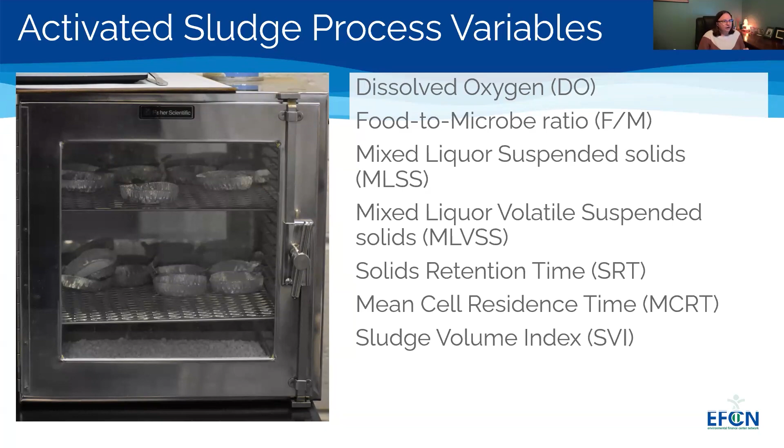So that's essentially all that we have talked about for the last 6 months in 1 hour and 6 minutes, I guess. So I hope that you found value in reviewing where we've been. Hopefully it will prepare you for where we're going. We are working our way through the treatment process. And so the content that we've covered so far, if any of it felt unfamiliar, if you need to review, all of that content's available to you.